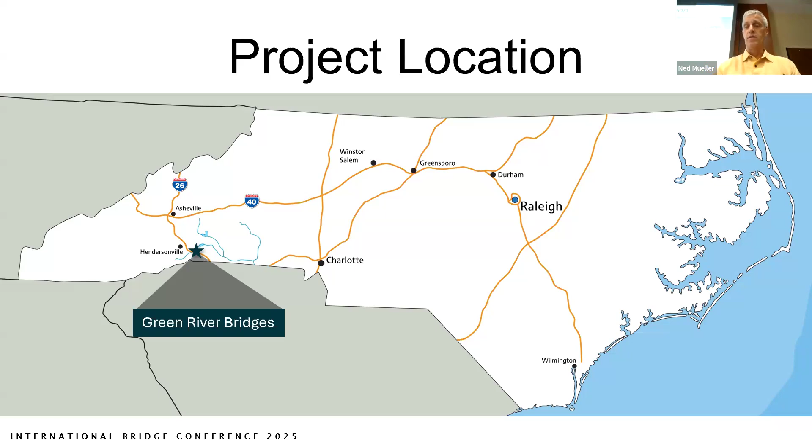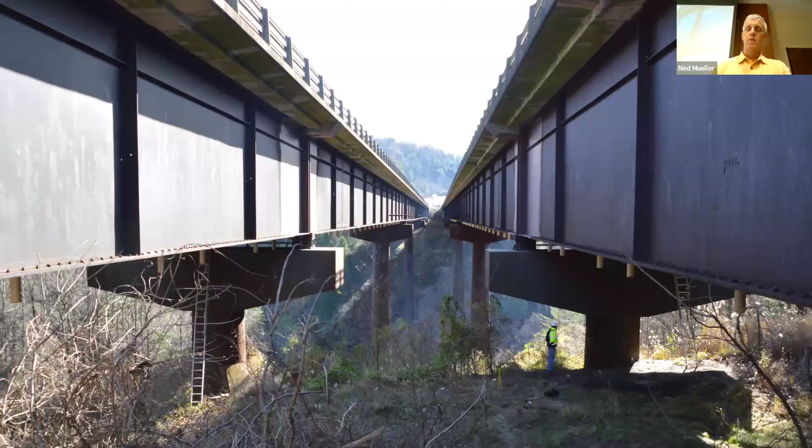The Eastern Continental Divide is in the distance there on that ridge, and the Green River flows underneath these bridges to the Atlantic. The Green River game lands surround the area, lots of hiking, kayaking. It's a very popular outdoor area and very environmentally sensitive. As you drive across the bridge, like most bridges, you don't really think about what you're driving across. But these bridges are especially unusual for us.

If you look over here, you can see there's a person standing here with a hard hat and safety vest on. That's John. And John is 6'6" tall. And look how tall these girders are. These girders are 14 feet tall. Again, you don't realize how big these girders are. It's really impressive.

They were designed to be non-composite. And let's see, the approach spans are simple spans, total 5-span bridge. The approach spans are simple spans and a 3-span continuous in the middle. Here's a typical section of the two bridges together.

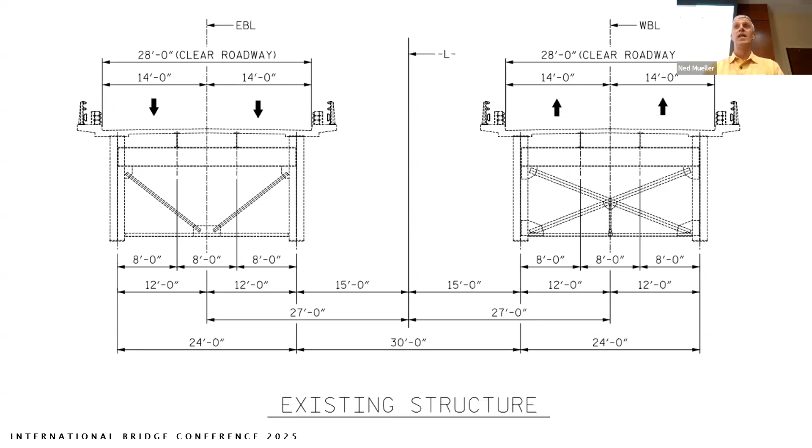The clear roadway width on both bridges is 28 feet. The spacing of the main girders is 24 feet between each of the main girders. It's a deck, stringer, floor beam, and main beam system with 2 main beams for each bridge. And so it is a fracture critical condition. And it's 30 feet between each of the bridges.

There are transverse stiffeners at each cross frame where the floor beams are located. It's 23 feet 7 inches spacing for those. The bridge was built in 1968. There was some significant rehab and repair work done in the 90s, and John will get into that a little bit more in just a few minutes.

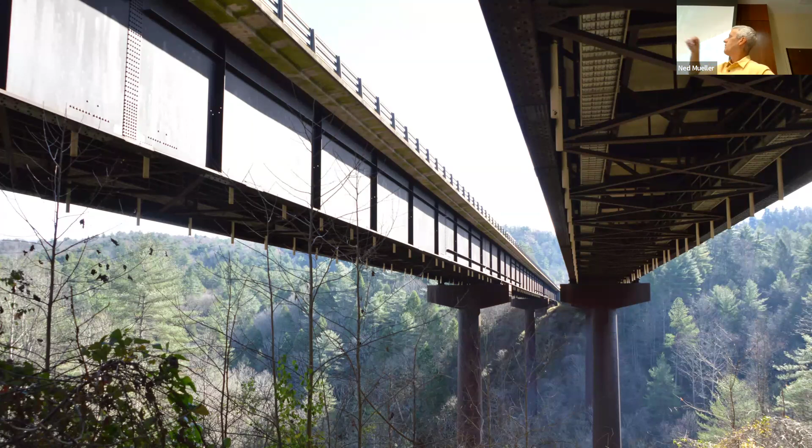And I don't know if you can see here, on the upper left here, the splice plate, the bolted field splice, not unusual there, but on either side of that, you see there are some bolts in the web of the girders. That is a little bit unusual, but that is related back to some of the rehab that was done in the 90s, and John will touch on that. Oh, also, there's longitudinal stiffeners in the compression zones.

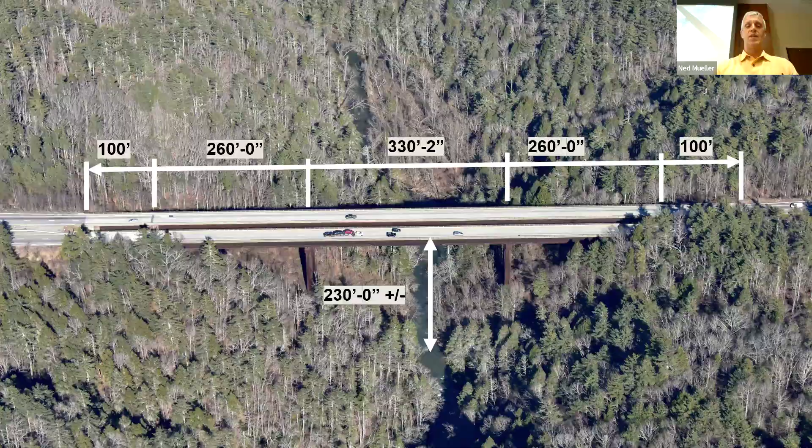Here's an aerial view of the bridge. Again, 5 spans, 100-foot simple spans on each end, and then the 3-span continuous in the middle there. The total length of the bridge is 1,050 feet. And it's about 230 feet off the water. Here's a view from the catwalk below. It is in the top 5 of highest bridges in the eastern part of the United States that is on the interstate system.

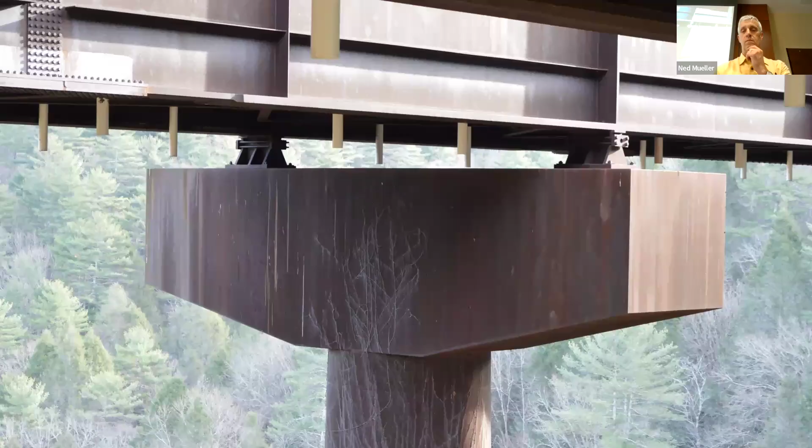A little bit more information. The bottom flange of these girders is 3 3/4 inch thick and 30 inches wide, and the web is 5/8 inch thick. The interior hammerhead bents are actually reinforced concrete, and the steel that you see here is really a stay-in-place form. And I think the steel stay-in-place forms were probably used for a couple of reasons.

One reason is it's probably more aesthetically pleasing in an environmentally sensitive, outdoors place like this. That brown rust color is a little bit more aesthetically pleasing for the area. Plus, we're in a big gorge here. So if you have these forms in place for the columns and what have you, removing those forms is going to be a lot of work, right? So it made sense just to leave those there. So I'm going to hand this over to John here in just a moment.

We started looking at doing some rehab preservation on this bridge starting in about 2016, 2017. And the two bridges overall weren't in terrible shape. The substructure was good. The superstructure had some issues that we knew we could address. The worst items were the bridge decks. As a matter of fact, as John was developing the project, a hole developed in one location in one of the bridge decks. That's how bad it was.

And so we were trying to figure out the scope of work and what we could get done. Again, a lot of traffic in there, very narrow. And so to do any deck work, we're going to have to close a lane at a time. And the division was very reluctant to do that, and understandably so. And so we were back and forth, trying to come up with ideas of how to handle this, at a little bit of a wit's end.

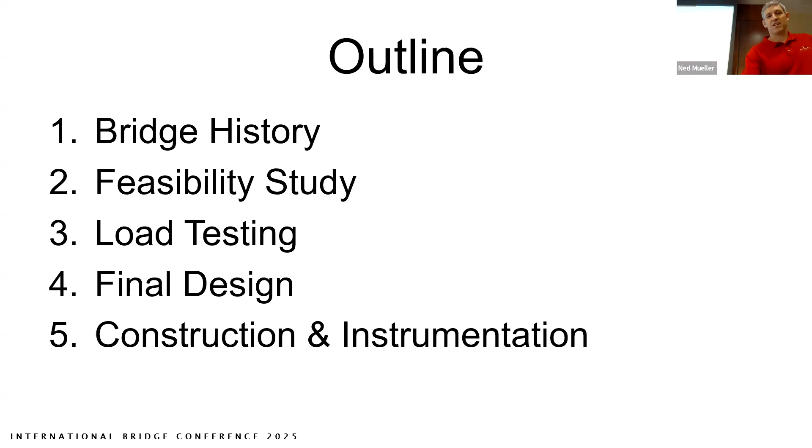So as far as the history of the bridges, they were built as separate bridges in 1968. Catwalks were added underneath to improve access for inspection in 1976. They added guardrail in front of the barriers in 1984. Then in the 1992-93 timeframe, some cracks were discovered in some of the steel elements, so a major rehabilitation was conducted then with a bunch of testing.

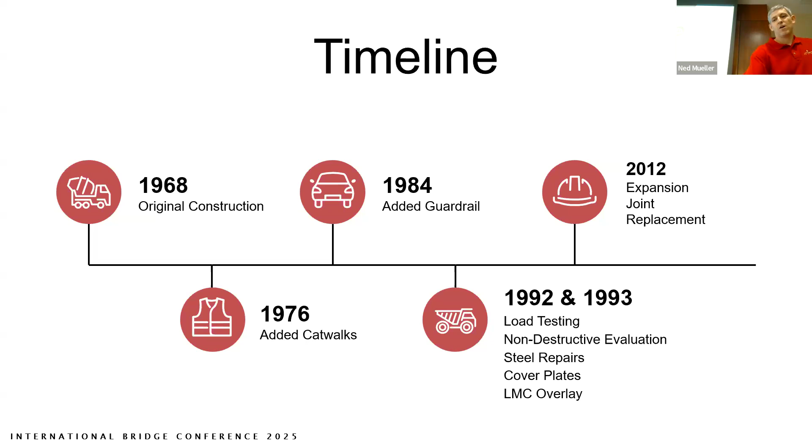In 2012, there was an expansion joint replacement. And then in the 2017, 2018 timeframe, we started looking at what we should do. NCDOT was evaluating what it should do with these bridges. Here's a picture of the guardrail in front of the barrier that was placed in 1984.

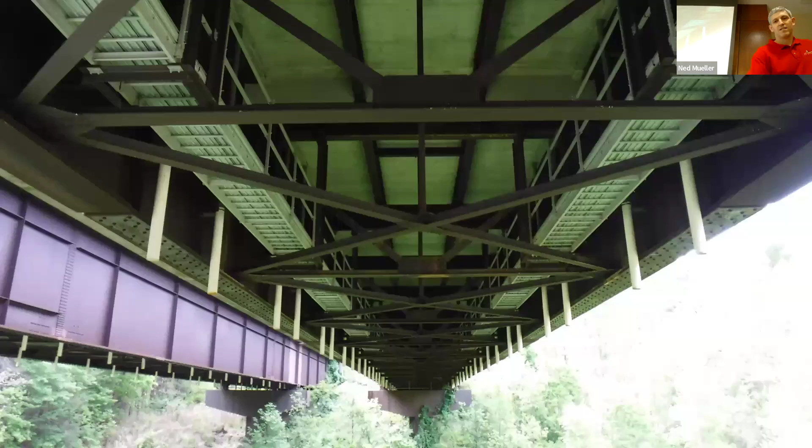This is a view underneath the structure. You can see basically the catwalks. You can see the K-frame diaphragms that are there, some X bracing. I'm going to talk about those in more detail in a minute. And then right here by the girders, you see these cover plates that were installed in 1992 and 93 as part of the rehabilitation.

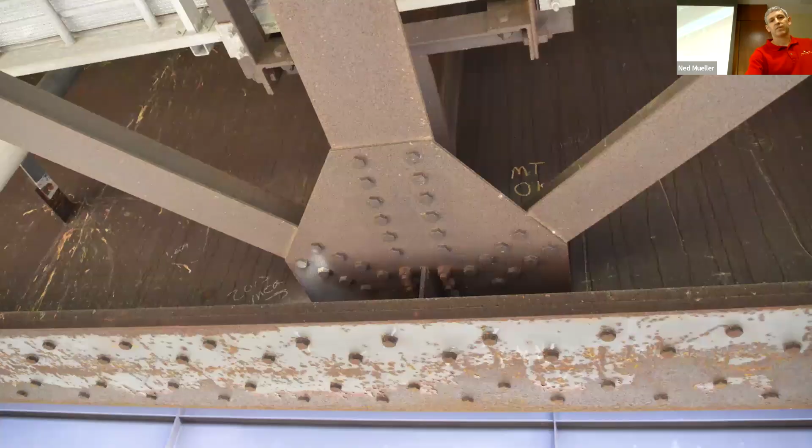So here's a close-up of the cover plate that's bolted to the bottom flange. And then you see as well the gusset plate where these cross frame members frame into the girders. We're going to talk about those in detail as well, because there were some issues related to those.

So in 1992, some cracks were discovered in one of the girders, and that prompted a very in-depth, detailed investigation that NCDOT conducted. They hired Lehigh University to conduct an assessment. The investigation was focused on one area in particular at the beginning, span D, girder 1.

At the bottom flange, they took several cores. They completed hardness testing and chemical composition testing. They noted that one of the plates in the bottom flange did not meet the material specifications of the original construction project. So there was high carbon content in one of these plates, and that's what led to the cracking when the bottom flange was welded to the web.

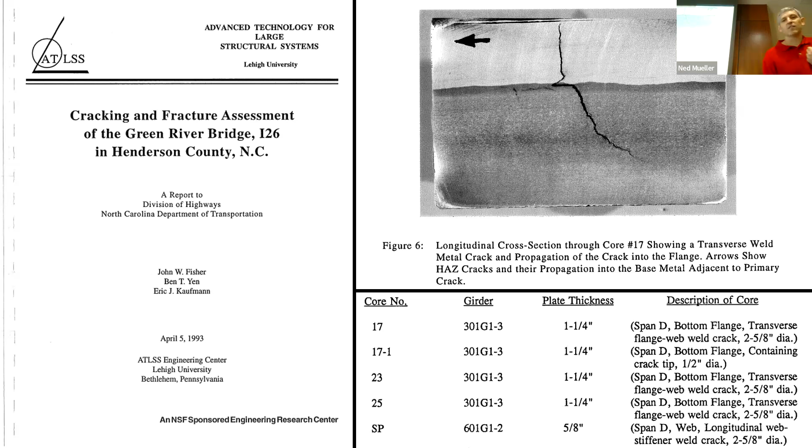Ed Zoe got his master's degree and his PhD at Lehigh University in the 1980s, and he studied under these men, John Fisher and Ben Yen. So he knows them personally. He was not at Lehigh while they did this project, but he's a national expert in steel and instrumentation, and he was a technical expert for us on this project.

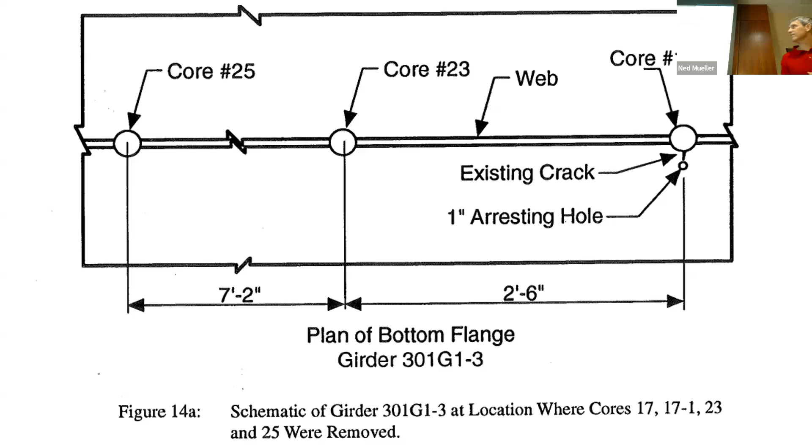All the cracks were related to hydrogen-related cold cracking at fabrication. So all the cracks that were discovered in this area were present in the bridge from the time it was fabricated. It probably happened immediately after the welds took place, within a couple of days after the welding.

There's no indication that any of the cracks actually grew in the 24 years between the time the bridge was fabricated and the initial discovery of the cracks. There was patina that had developed inside of the cracks, so on and so forth. So that's basically a rundown of the cracking in those areas.

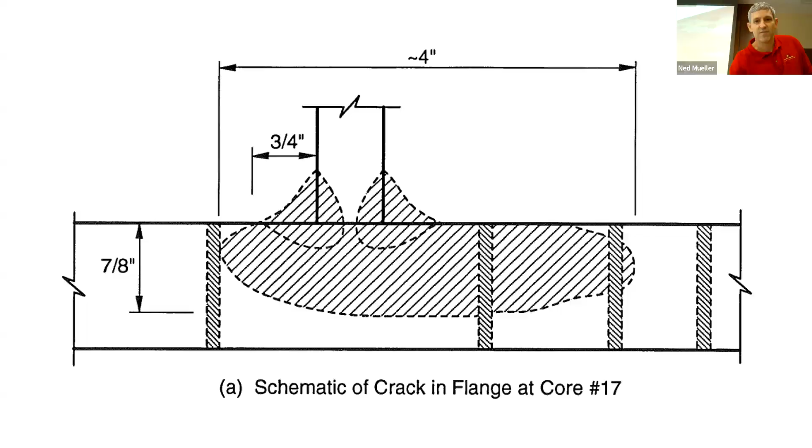So what they decided to do as a rehabilitation was to add the cover plates. And there's another picture. It does terminate when you transition from the positive moment region to the negative moment region, but even though only a single plate was defective, they bolted these cover plates to the bottom flange in all spans, on all girders, both bridges, just for redundancy and to strengthen the structure.

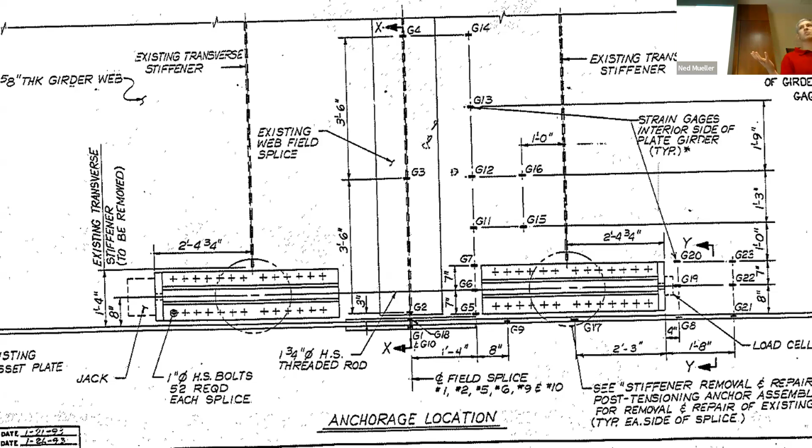The way they did that at the bolted field splices was that they bolted these tubes onto either side of the splice and then had a post-tensioning rod to post-tension it. They removed the bottom flange splice plate and then put the cover plate on and rebolted the splice plate back together.

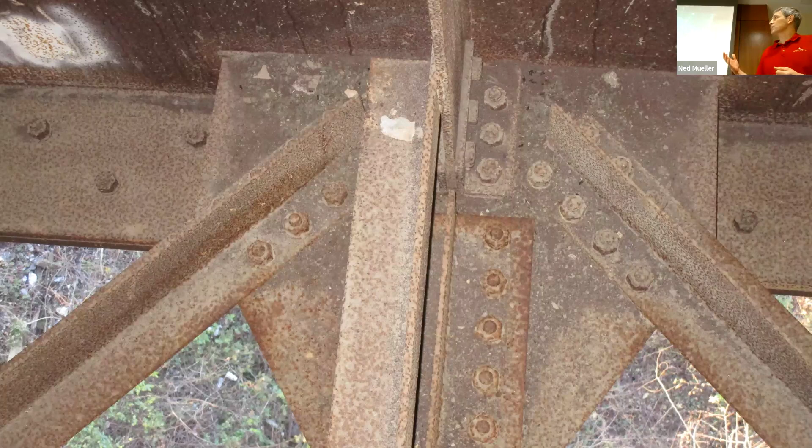So another issue that they ran into in 1993 was these gusset plates and the members that frame into these gusset plates. So they're very slender. And they were getting some distortion-related fatigue cracking along the welds of this plate. So NCDOT has over 500 pages of non-destructive testing. They did magnetic particle testing, ultrasonic testing, and liquid penetrant testing that was completed between July and December of 1992. So they did a thorough investigation, were able to eliminate all of these cracks, mainly just by grinding them out.

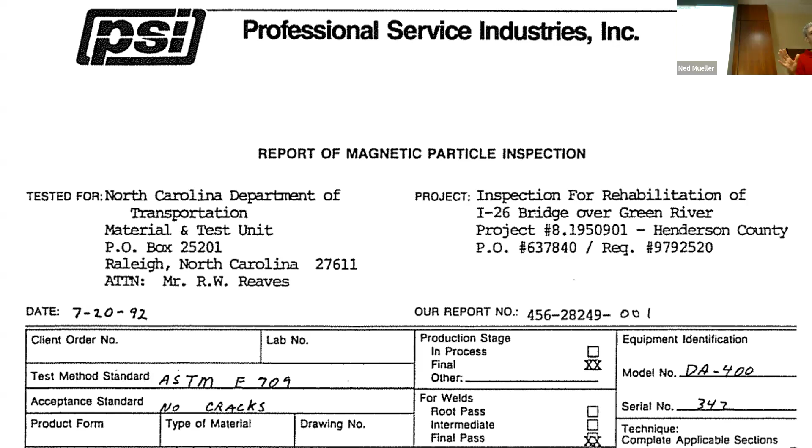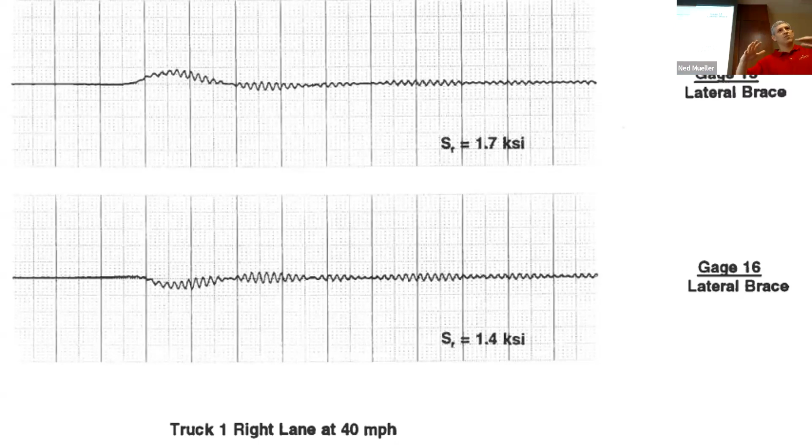But for the reason that these cracks were occurring, the NCDOT with Wiss, Janney, Elstner did some load testing, and this is an instrumentation gauge, a strain gauge that is attached to the cross bracing. You see the large hump there. That's when the truck or a vehicle goes across the bridge. But then you see all these secondary oscillations in the data. And so what was happening is a truck goes across the bridge, but then the bridge continues to vibrate. And so you have this very slender cross bracing that's going up and down the whole time. And that's a problem for the bridge.

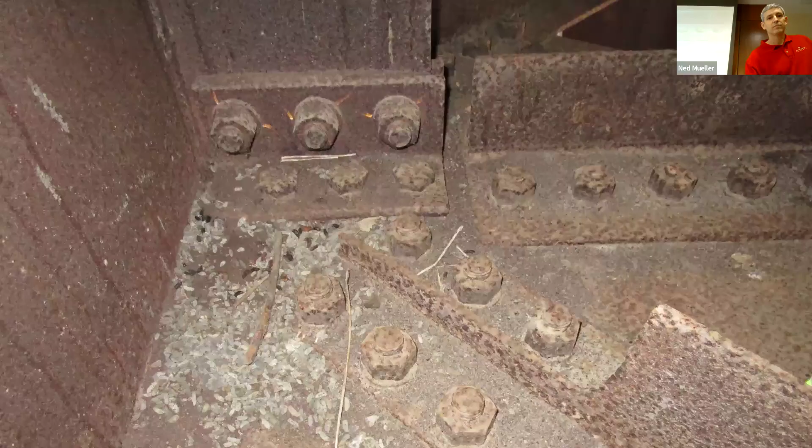So they added these posts that frame in to the superstructure and connect down to the X bracing. That stiffens the system. And so that X bracing is now no longer flopping up and down as vehicles drive across the bridge. They also bolted these angles to the gusset plates and the stiffener to just, again, stiffen this whole system together.

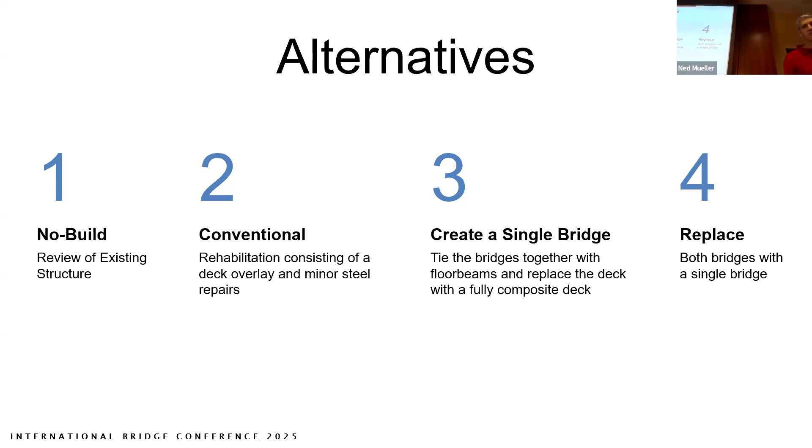So that brings us to the feasibility study. And initially, we were thinking there would just be a conventional rehabilitation, but we decided to take a step back and say, maybe we need to look at different alternatives for this crossing here. So we looked at no build, conventional rehab, tie the bridges together, create a single bridge, and then replace the bridge. As Tim mentioned, as we were doing the feasibility study, a huge hole opened up in the concrete deck.

So fatigue again was an issue. There were some indications that were noted in the bridge inspection report. When we looked at and evaluated the existing bridge, we discovered that it does not meet the code for fatigue service life, or for an infinite fatigue life. And so we were basically infringing on the factor of safety. There were a few indications that were noted in the bridge inspection report.

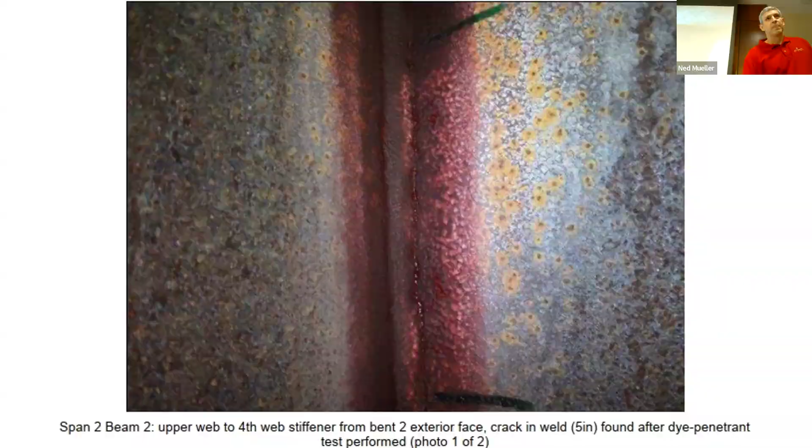NCDOT hired S&ME to go out and do a thorough investigation with non-destructive evaluation of the indications. Most of it was really minor. They did discover some issues with some of the welding in terms of start and stop, weld spatter, arc strikes, cluster porosity, overlapping welds, those kinds of things. A lot of the issues that were noted in the inspection report, they were just able to grind out, and it was not a problem. Overall, after they had finished up, there were really only 5 locations of concern that we were able to include in the rehabilitation of the bridges.

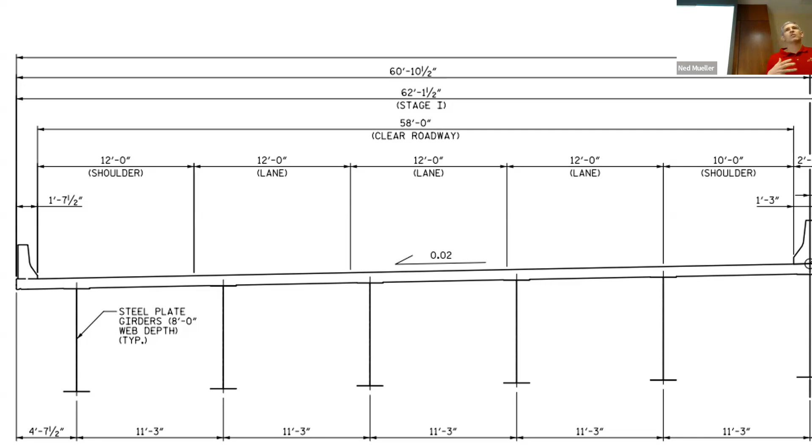So looking at the replacement alternative, again, everything that Tim said at the beginning with the terrain makes a replacement very difficult and expensive. Certainly it's feasible, but it's just very, very expensive. You've got mountains all over the place. You've got very steep grades, difficult grades. Bringing the roadway up to modern standards, you're raising the profile very high.

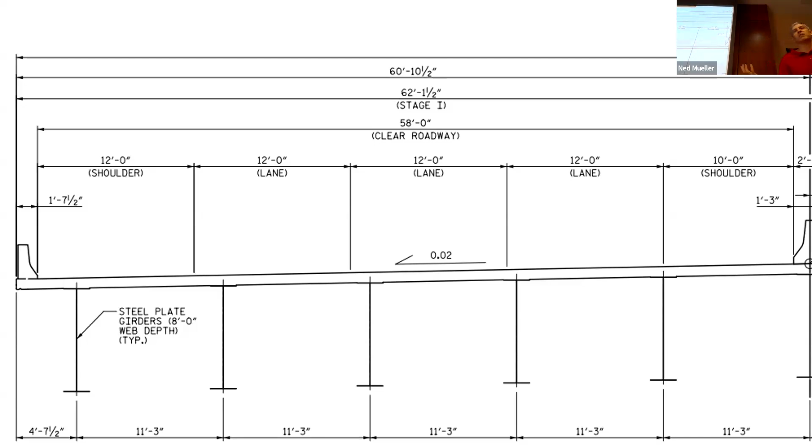It's just very expensive, and you don't want to necessarily include that in your bridge preservation program, right? You don't want 2 miles of roadway upgrades. You don't want to be using your bridge preservation funds for that kind of interstate upgrade. So this is like a half typical section of the replacement alternative. As we looked at the costs, the cost of replacement is over 4 times the cost of the alternative to tie the bridges together and rehabilitate them.

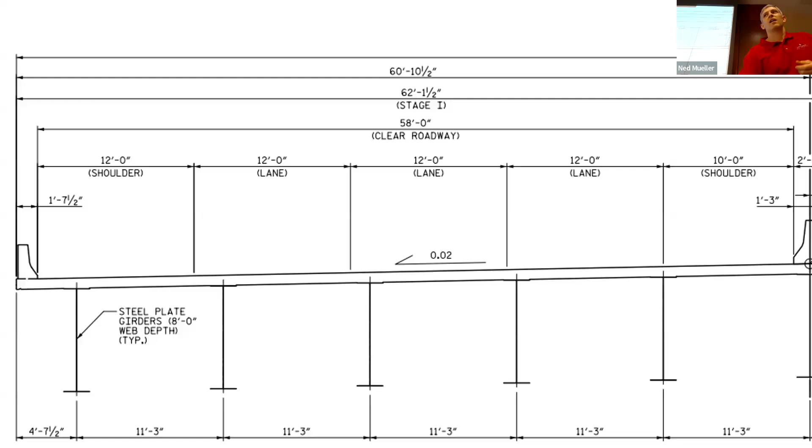So in the end, as we've concluded our feasibility study, NCDOT decided to move forward with tying the bridges together with floor beams and replacing the deck. As we transitioned into final design, we scheduled a load test. Mark Gusta led this effort, so he's going to be with us in a couple of weeks when we present at the International Bridge Conference.

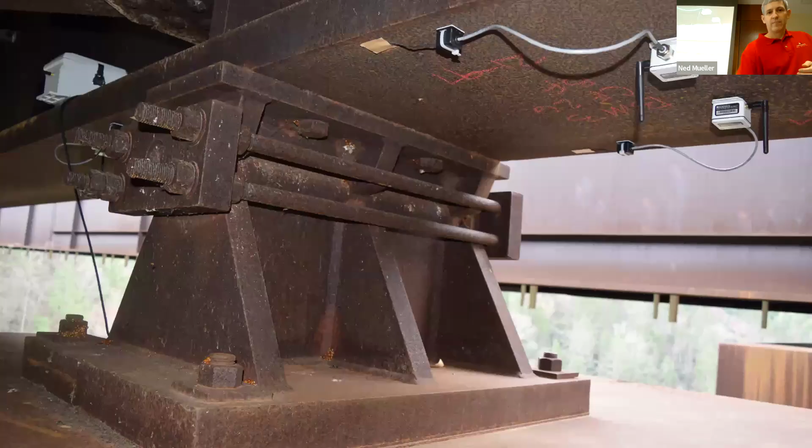But NCDOT provided these trucks. I think they're 70,000 pounds plus or minus, so 35-ton trucks. We ran them in a lot of different configurations. We tested both bridges. We did it at night with a rolling roadblock with the state police providing that rolling closure for us. This is a view of the instrumentation. There's strain gauges there on the bottom flange. You've got a transducer that's transmitting the data wirelessly with the antenna and so on.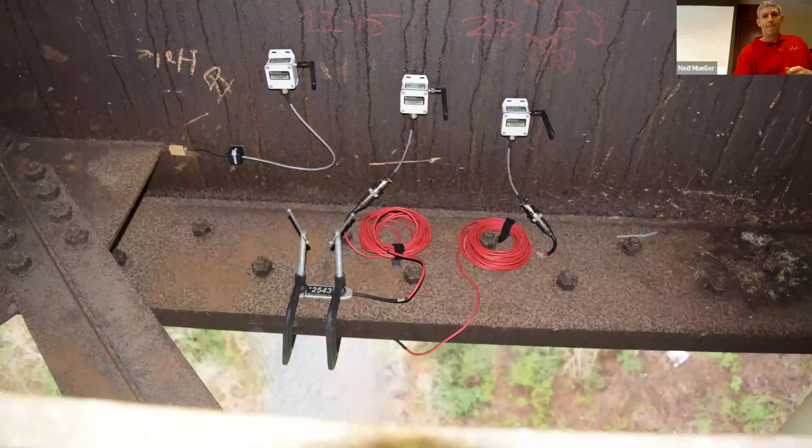So this is out at midspan. We've got a strain transducer on the top of the bottom flange that you see there. And then underneath, just out of view of the photo, there's another one on the bottom of the bottom flange. We had 2 gauges to confirm that the cover plate is part of the structural system. And so we were essentially reading the same strain values on both of those gauges. So that was very good data for us and reassuring.

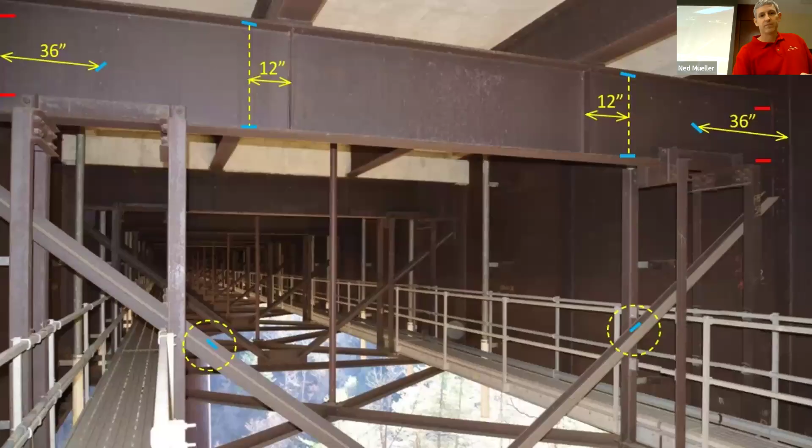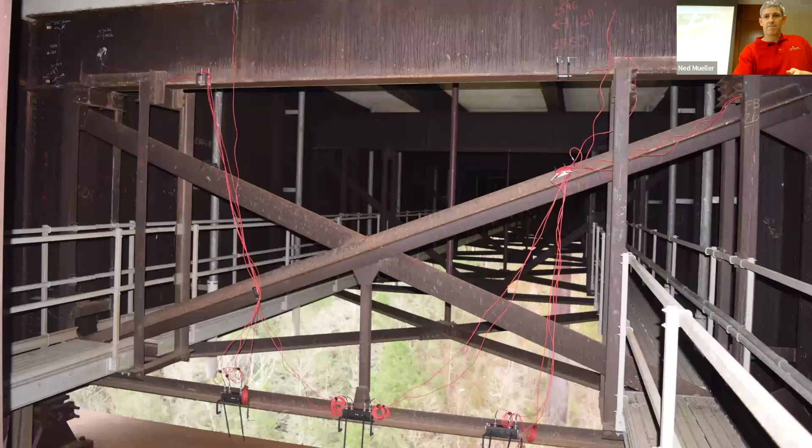The other gauge at the upper left by the gusset plate, that's evaluating the fatigue, right? Because this is a fatigue prone area. It's a category E fatigue detail. So that means you have a very low stress range that is allowable for that particular detail. We instrumented the cross frames. This is the K-frame diaphragm. So we've got all kinds of instrumentation there. This is the X-frame where we've got a lot of instrumentation as well. That's the actual instrumentation setup.

So just as a summary, basically we confirmed that the bridge is behaving in a composite manner. This is really important: we confirmed there's no live load forces in the K-frames and the X-frames. Obviously, they were critical for constructability, for bracing and those things, but they're not participating in the live load resistance of the system.

Another really critical aspect of this was validating our design model. And when we got into construction, there was a lot of comparison between the load testing results and the actual analytical model that we developed to make sure that what we were designing and analyzing is representative of reality.

So in the girders, I'll give you some maximum stresses here. In the girders, the maximum flange stress under the live load was 2.7 KSI in tension in positive bending, and 1.3 KSI compressive stress in negative bending. And then for fatigue, we had basically a stress range of 3.5 KSI, which is under our 4.5 KSI limit. But once you factor it, you're basically infringing on your factor of safety.

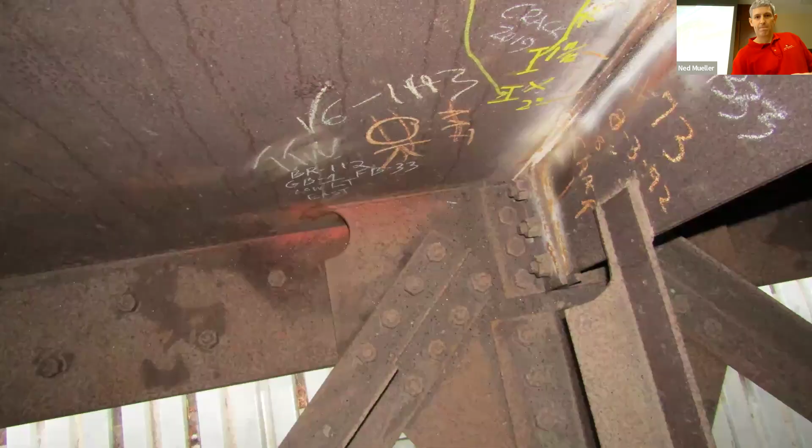So what we did there, this is a picture from construction. I was skipping ahead to construction just a little bit because this idea came from our load testing team. They said, well, hey, why don't you cut out a radius there from that gusset plate? And the bridge code allows you to change this; it's now a category D fatigue detail, and it gives you an allowable stress range of 7 KSI. So that improved the performance of that detail there.

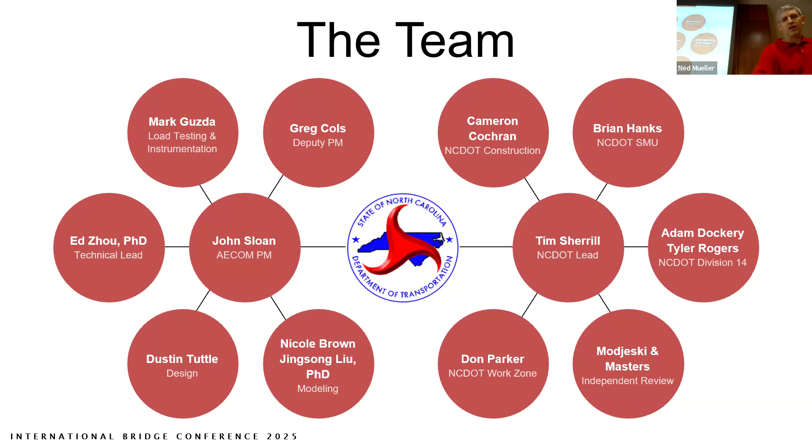Now transitioning into final design, this was our team, and this is only the structures team. I like to show this slide. There's absolutely no way we could have done this project without a really outstanding team that came together. Again, this is just the structures team. I like to show this slide because this was a multidiscipline transportation project, right?

So hydroplaning was a major concern, hydraulics. There's a history of crashes under rain events in this area. So that was an issue we had to reckon with.

Basically, the work zone traffic control design was very challenging. How do you shift traffic back and forth as you're constructing this deck to maintain traffic on the bridge throughout construction? That was a big challenge. And then the roadway design was also very challenging because you've got a fixed bridge and you've got to basically thread the needle with your roadway profile. Very, very difficult and challenging from a roadway design perspective.

Well, this is what we ended up with for our final typical section. We put a floor beam in bay 2 to connect the two bridges together. We strengthened all 4 girders. We added cover plates. We brought the detailing up to modern code requirements. So we added stiffeners, both transverse and longitudinal stiffeners. We added these knee braces here, or corbels, whatever you want to call them.

That was necessary primarily because you get really high moments in your floor beam connections as you shift traffic back and forth, and as you remove the deck and then put deck back on. There's really high moments in those connections. So we did that. And then obviously you've also got the stringers in bay 2 that were added.

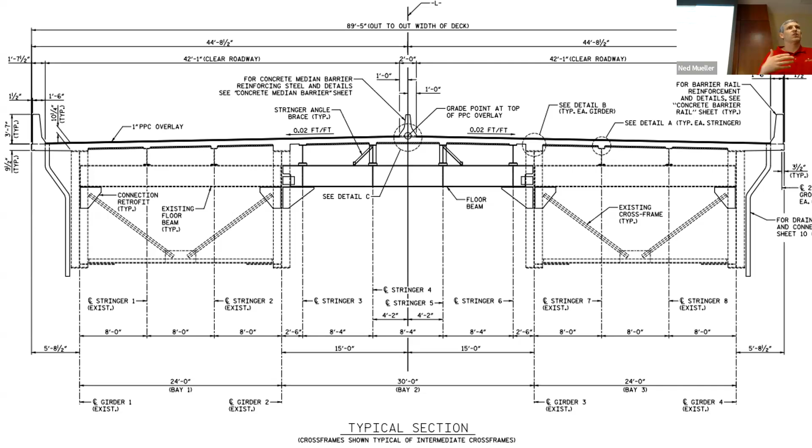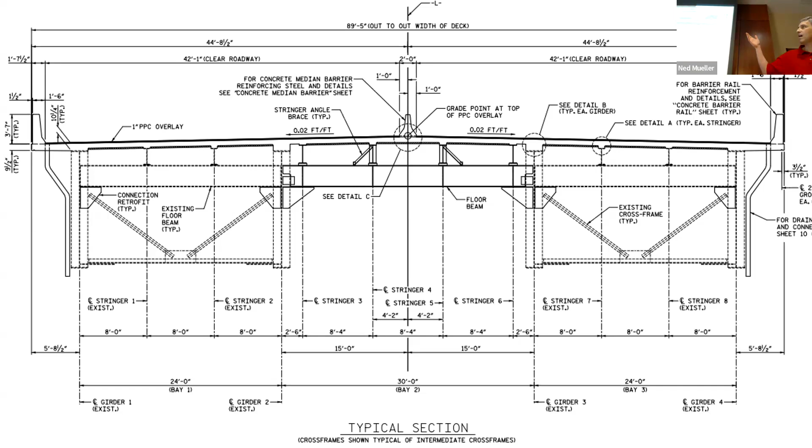So we bolted shear studs onto the top flanges of all the girders and stringers to make it fully composite so that we could assume that the behavior is composite. So we replaced the bridge deck with a lightweight deck and utilized a PPC overlay.

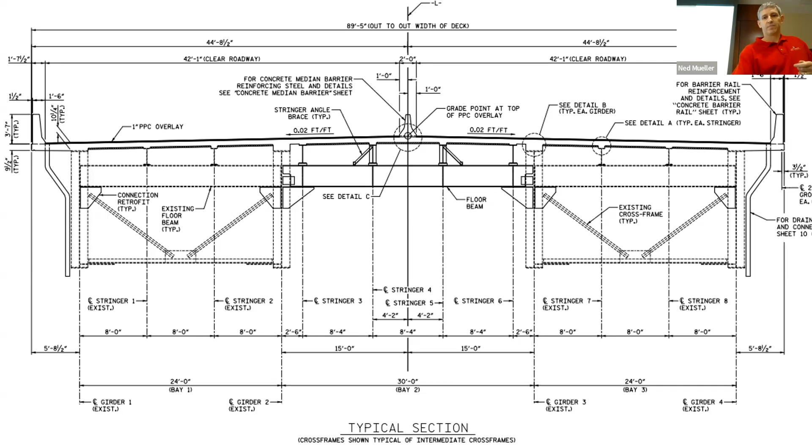So here comes the visualization. I think we should have sound here that shows basically how we got the bridge constructed and all the work that we did to pull this together. Let's see if we can do this. Here we go.

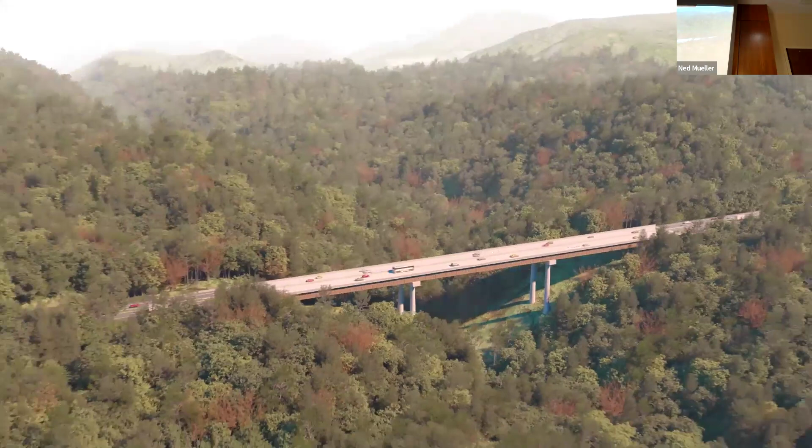All right. Didn't go quite that fast in the field. Yeah. So our visualization team did a great job on that.

This is nonlinear, right? So we've got to account for the stresses at each stage in the design and in construction to make sure that we're not overstressing at any given point during construction, but also we're accounting for all those changes throughout the whole construction process. In addition, we included the original construction and the 1993 retrofit in our modeling as well.

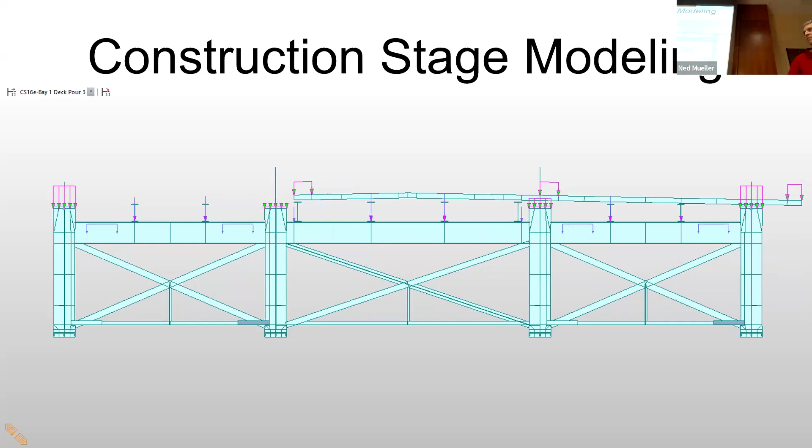There's just the next stage in the model. Again, you've got proposed deck in the middle and over here all the way to the right. And then on the left, you've removed the deck. So with this, we've got beam elements for all these cross framing members. Again, the X frames were at the piers, the K frames were kind of interior. So we had beam elements for those interior elements, and then the girders were modeled with shell elements.

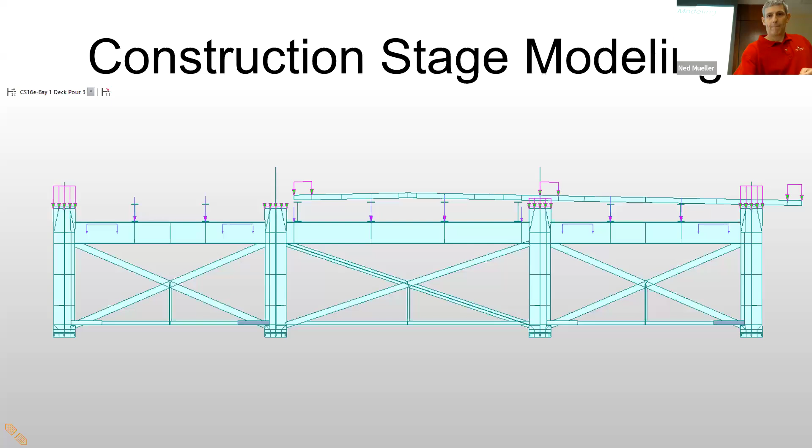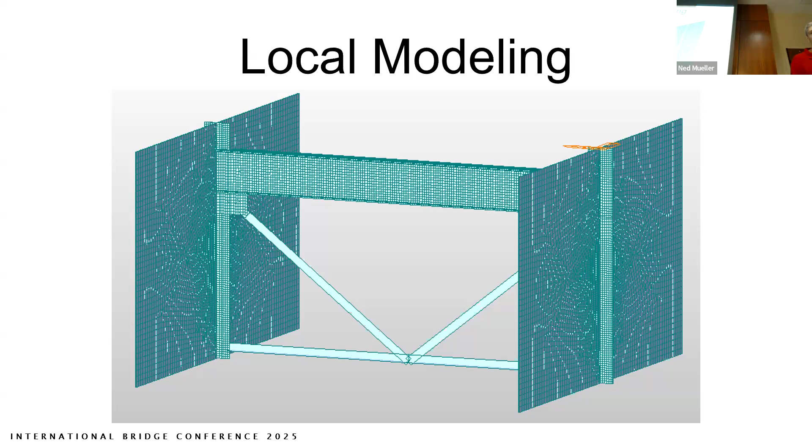We also did some local modeling to confirm the behavior of the bridge at these diaphragm locations. That was very helpful for us. We had multiple different models where we looked at things in a very localized way, just to confirm the manner in which the stresses are flowing.

And then, of course, we had to account for all these stresses throughout the whole construction sequence. So basically, you begin and you add the median barriers or some of the barriers. That's the initial load. Then all the iron work. We required all the steel and iron work to be done first before you actually load up the bridge.

We got the girders up to code. So once we did all the iron work, the bridge met the AASHTO code. Everything we did was in accordance with the new AASHTO LRFD code once we got all that iron work in place.

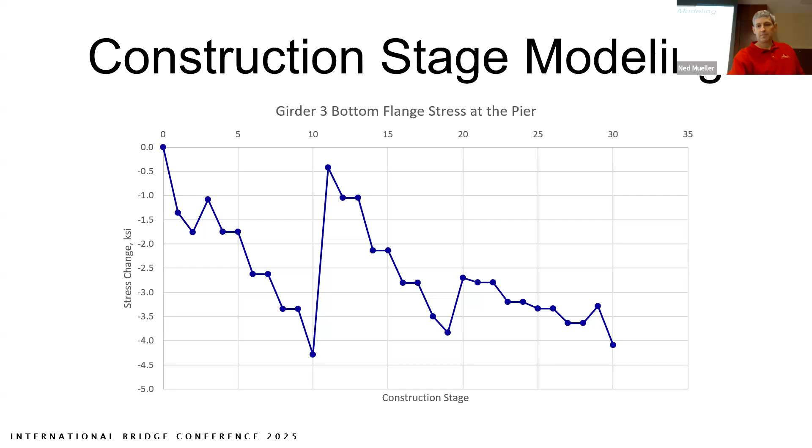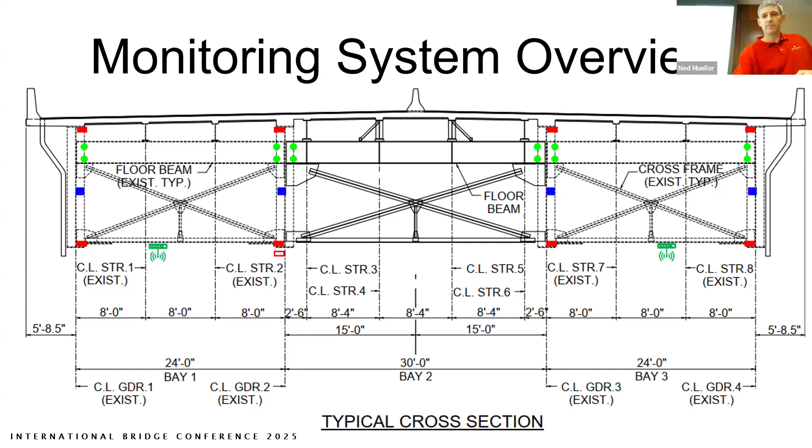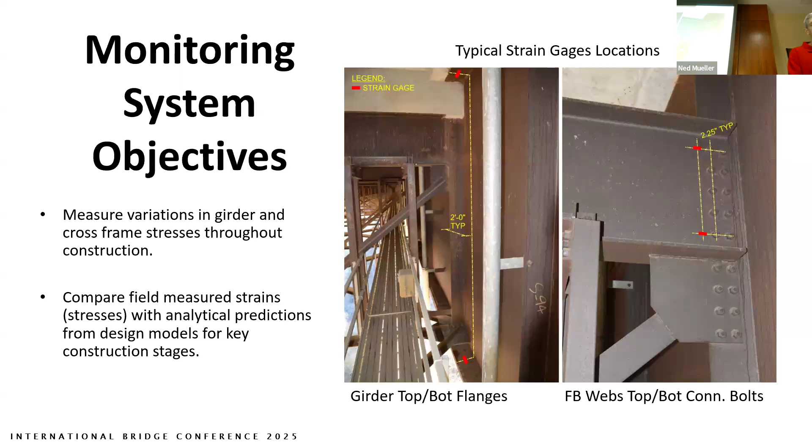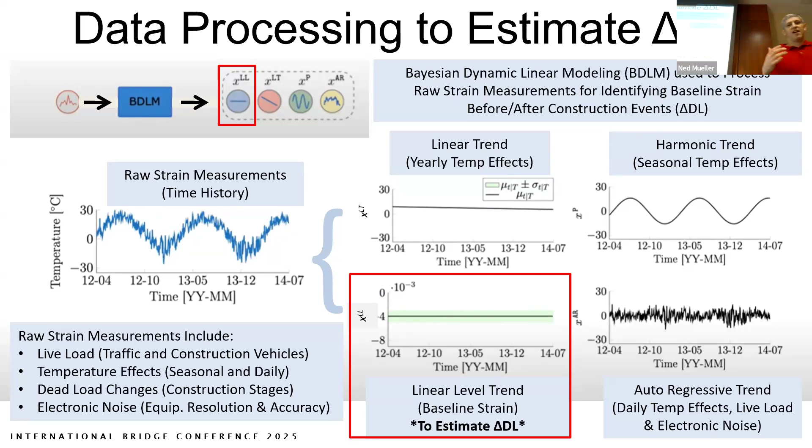Again, the main goal here is as we're changing the dead load, we're trying to make sure that we've got an accurate handle on all the dead load changes throughout construction. But the problem is the strain gauge can't tell the difference between daily thermal fluctuations, seasonal temperature changes, live loads, dead loads. All it measures is strain. So we have to parse out all the different data, and to zero in on the dead load changes, we use what's called the Bayesian dynamic linear modeling method, and we process that data to zero in on the actual dead load change.

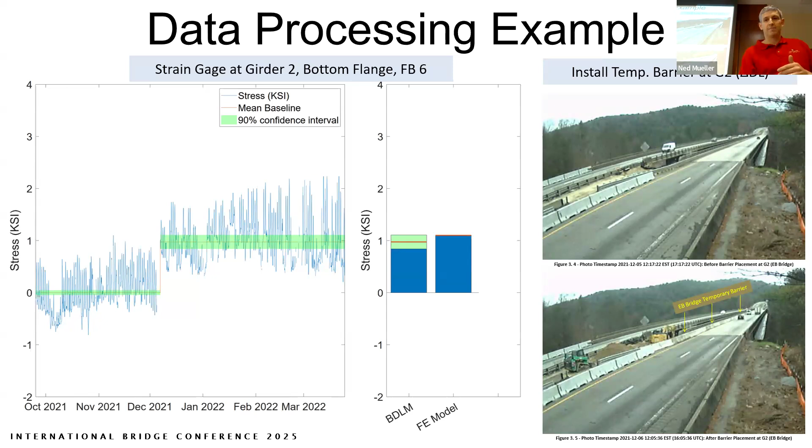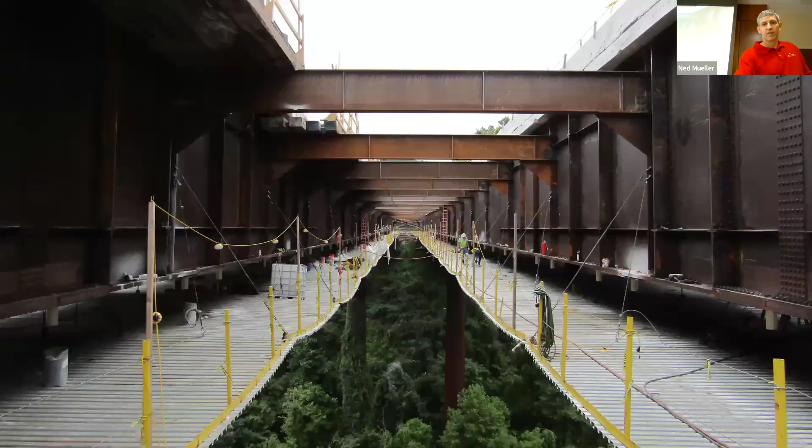So now getting close to the end of our presentation, I've got about 10 or 12 slides to go through the construction. This is basically a photo when we've added the floor beams and the interior ironwork. This is a slide from below. The contractor had this really nifty idea to put what's called a SafeSpan platform underneath the bridge. They suspended it from the bridge itself, and that allowed all their iron workers to get down and have easy access to the bridge.

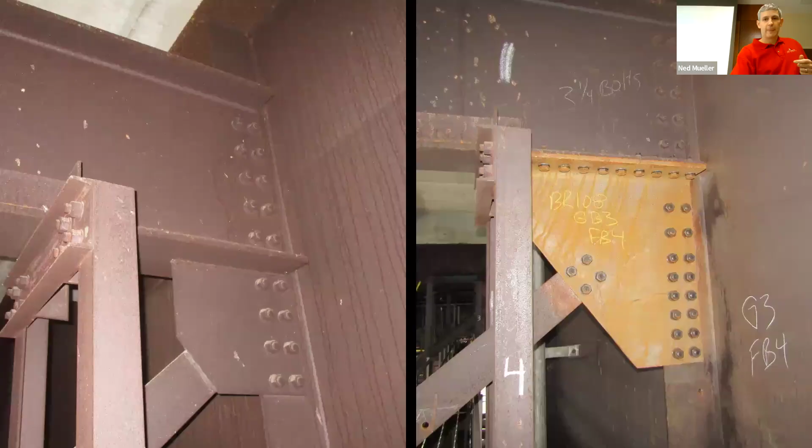This is a picture of the retrofit of the knee brace or the corbel. The one on the left is the before photo. That was removed and we added this larger, stronger knee brace. Again, the behavior of the bridge is dominated by the floor beams in the transverse direction. This diagonal member is not really doing a lot for you other than providing some bracing in terms of live load resistance. So with live load, you've got basically the stiff beam element and a high moment demand. That's why we needed such a big brace there.

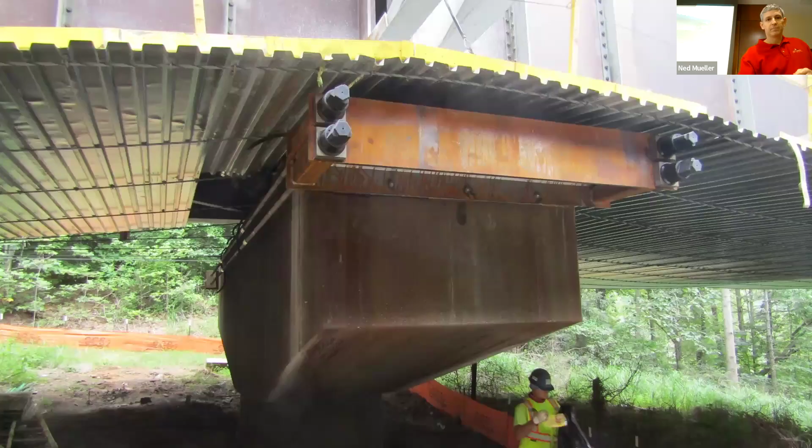As far as the substructure goes, we've got post tensioning that we added because you're adding some additional dead load. And so we post tension the cap to increase the moment capacity. Some demands in the substructure are actually reduced because you're tying the bridges together. So if you've got a wind load on the bridge, it's now shared by both bridges. So there's actually a lot of reduction in those kinds of demands.

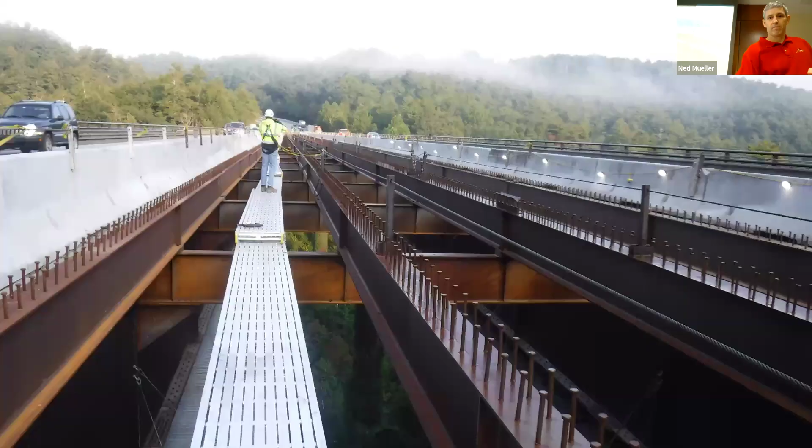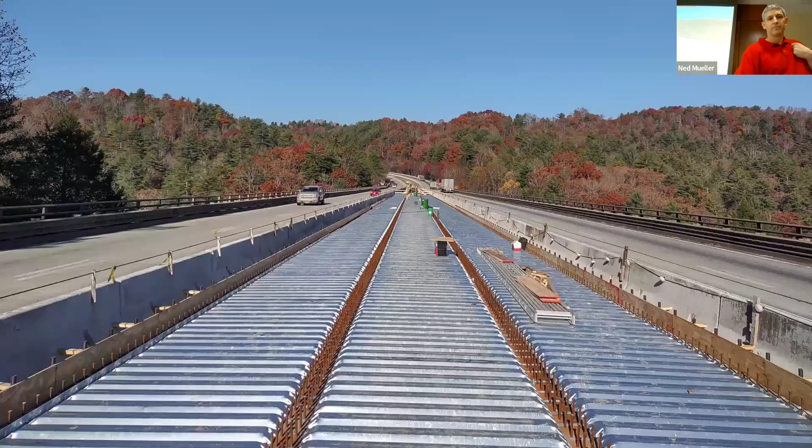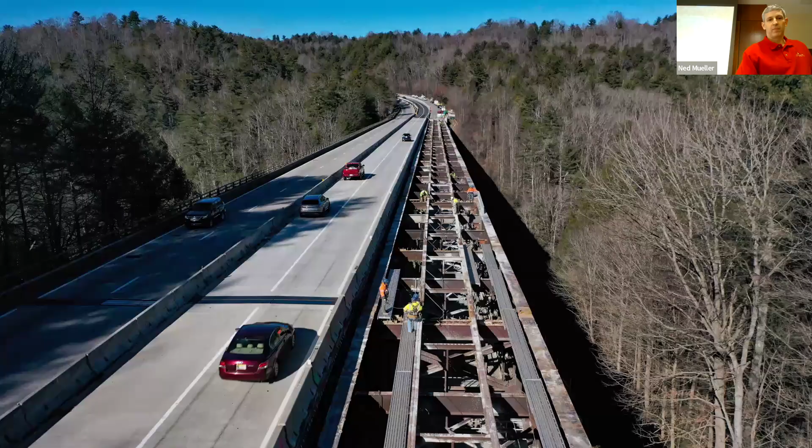Here's a photo of the stringers added. Got the shear studs there for composite behavior. Photo of the stringers and the floor beams from below. These hangers are there for the catwalk. We put 2 new catwalks on the inside of Bay 2. Deck pans are in place for pouring the deck. Then the contractor poured the deck, shown before shifting traffic. Then they shifted traffic over to the middle and removed the deck on the right-hand side in Bay 3.

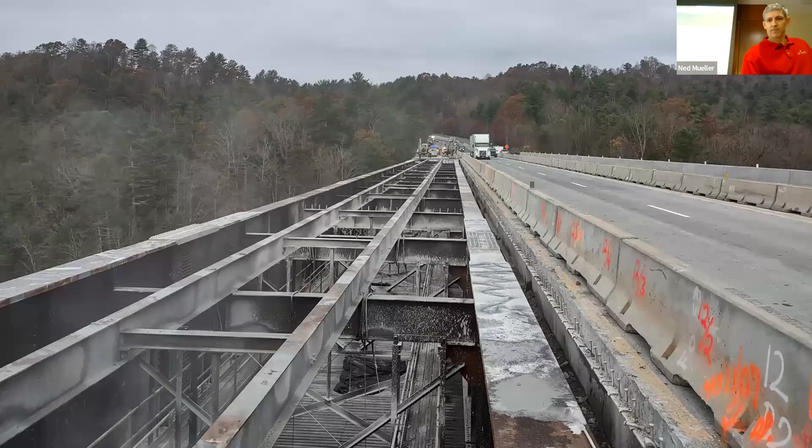This is after the deck was poured. This is about a year ago, last summer. They had poured the deck. This photo was taken in November of 2024. They had removed the deck in Bay 1 over on the left side.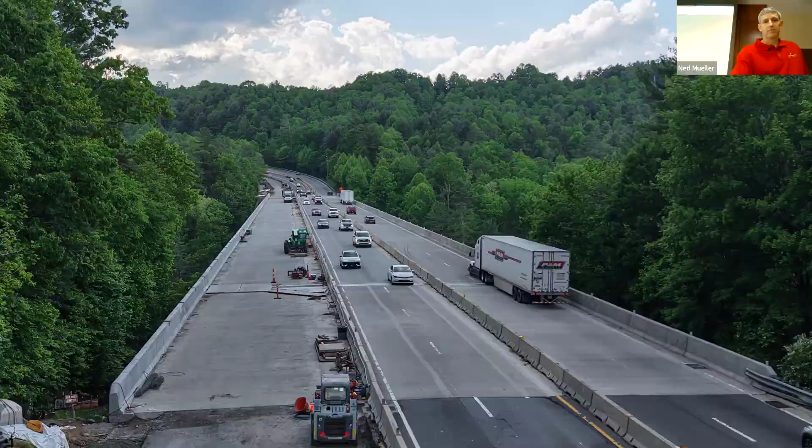Yes, sir. So this bridge was non-redundant, fracture critical originally. That's correct. And tying the bridge together, do you feel differently about its fracture critical nature? Redundant now? Yeah, that's a great question. I believe so. Yes. There are analytical modeling techniques that you can utilize to analytically validate exactly the level of redundancy and those kinds of things. We did not do that in this case, but yes, I believe there's definitely a dramatic, I'll put it this way.

It's not 10 girders. So there is less redundancy. There is some level of degree, right? When we talk about redundancy, I know we either say redundant or non-redundant, right? But it's not that black and white. So it's less redundant than a 10 girder system, but it's dramatically better than what we had previously.

And so, I normally try to share this anecdote, but your question reminded me of it, so I'm glad that brought it up. When we were out doing initial investigations, you just had the 2 girder system. These bridges were incredibly flexible. You're out on the catwalk underneath the bridge out at midspan, and you're literally bouncing up and down. Very, very flexible. And you're not only bouncing up and down, but you're bouncing sideways a little bit, which is a little unnerving.